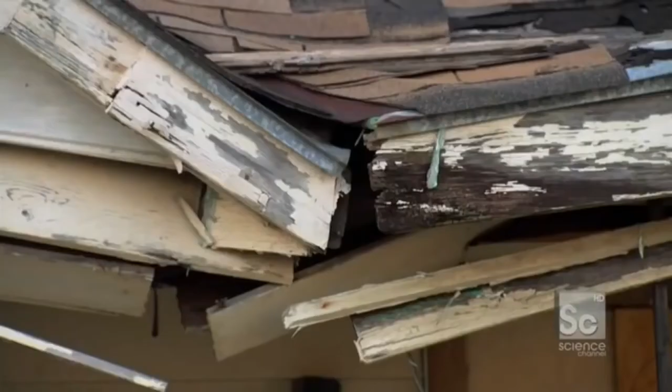It's been almost 5 years since Hurricane Katrina made landfall, and New Orleans is far from having recovered. Hurricane Katrina displaced more than 1 million residents, and since the event, less than half of New Orleans' population has come back. More than 80,000 homes remain unoccupied. The people of New Orleans are still living with the constant threat of another major storm. So this is still a city very much in crisis.

But New Orleans has a plan to ensure the city's safety for years to come and give people the confidence to come home. The federal government, the Army Corps of Engineers, and thousands of Americans are coming together to try and save this city. They're rebuilding New Orleans with hundreds of state-of-the-art, hurricane-resistant homes and a radical $14 billion storm protection system.

Prior to Katrina, this wall was the only line of defense that those residents had. It was the primary line of defense for hurricane storm surge. Tell me what's different now. What's different now is we've taken a step back and looked at the larger New Orleans area, and we've actually moved the primary hurricane defenses from this location to areas 8 miles away.

8 miles from downtown New Orleans, they're building this. A 2-mile-long, over 150-foot deep flood wall that is fundamentally changing how New Orleans will fight hurricanes. It's unlike anything ever built. The largest surge barrier in the world, nicknamed the Great Wall of Louisiana, designed to hold back over 44 million gallons of water from an oncoming storm.

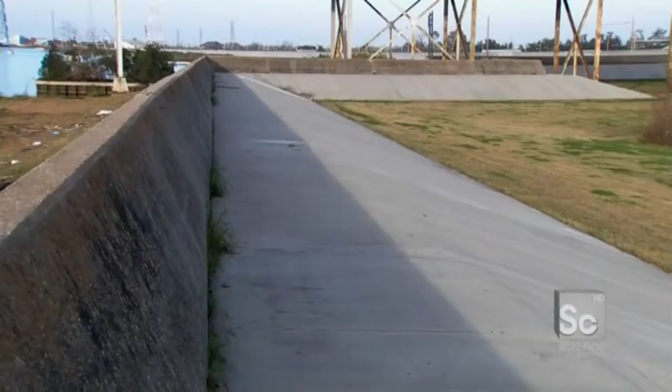Prior to Hurricane Katrina, stormwater flowed into New Orleans and was met by a 350-mile network of earthen embankments called levees. Located just 100 feet from people's homes, they held back the water, keeping the city dry. But when Katrina hit, the system was so overwhelmed by water, the levees broke in 50 places, flooding 80% of the city in just 5 hours' time.

To avoid this disaster happening again, the surge barrier is being built miles away from downtown New Orleans, where it can stop the water before it enters the city. Instead of waiting for the storm to come to them, for the first time, they are taking the fight to the storm. Is this a new way to think about battling hurricanes?

Nowhere in the world have we built a wall trying to keep out 25, 26 feet of water. No one's ever done it before. And this height here on a storm surge is unique. You gotta remember, the hurricanes that come to New Orleans are bigger, meaner, and there are more of them.

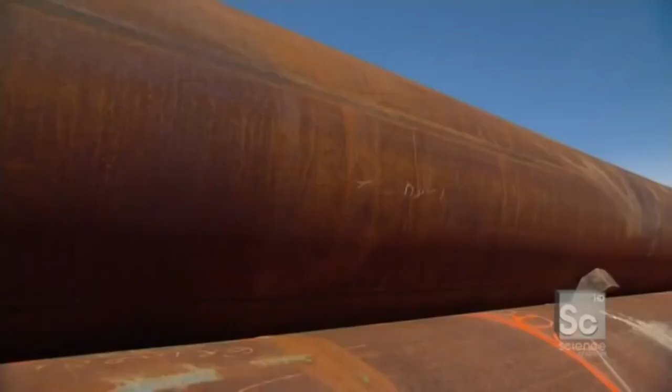To hold back a 26-foot wall of water, the barrier is fortified by 628 batter piles. When the storm surge hits the wall, what pushes back and keeps that wall upright and strong are these guys right here. They're called batter piles, and they're basically 288-foot-long steel tubes inserted into the back of the wall that support it and transfer all the loads of that storm surge into the foundation.

Since there's no bedrock to hold the pile in place, over 80% of the wall is actually below the mud line. The deeper the pile is driven, the more friction there is to hold it in place. Each pile is almost as long as a football field and placed at an acute angle for added stability.

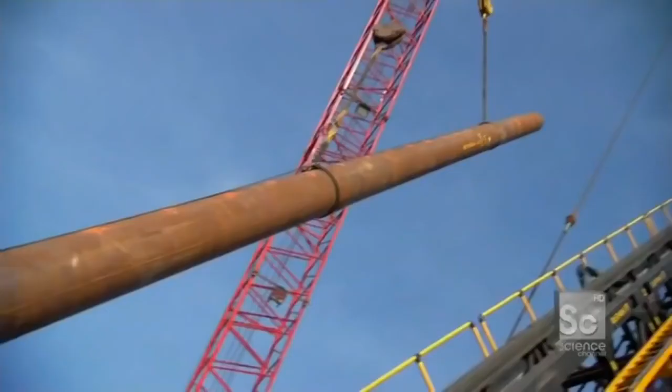What'll be interesting about this lift is that this pile right here is horizontal, right? But in the end, we have to get this thing at a 57-degree angle to feed it into the machine called the leads. No one has ever attempted to drive piles this size at an angle before.

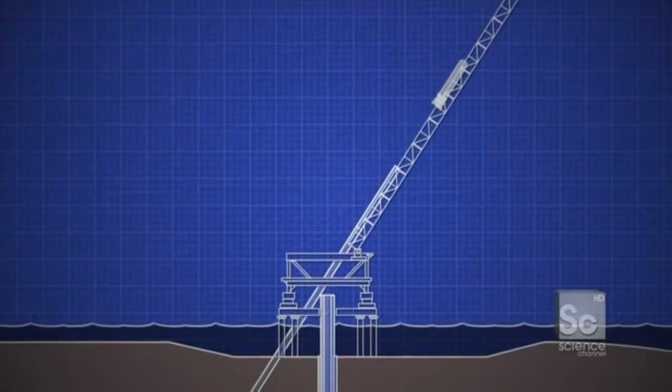To accomplish this engineering first, the Army Corps invented a massive 1,000-ton machine called the leads. Unlike traditional pile drivers that can only hammer vertically, the leads can hammer the piles at a precise 57-degree angle. And with 4 chutes, they can drive 4 piles in a row before moving on, saving almost 5 months of construction time.

So here it is, lowering it through the leads, right? The thing that's leading it right down this 57-degree angle, getting into position so we can start knocking this straight into the ground.

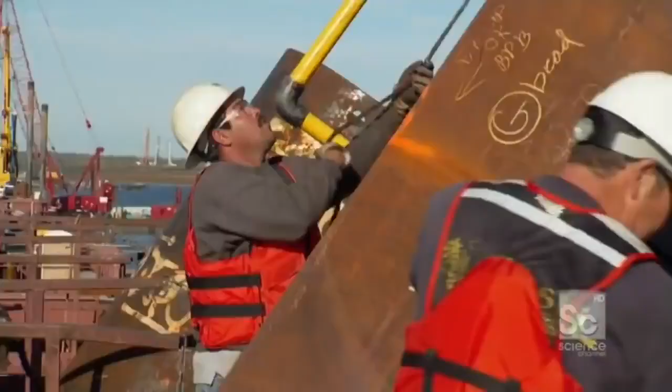Even the leads isn't big enough to handle a 300-foot-long pile in one go. So they're driven in two sections. The first section is 158 feet long and weighs more than 13 tons.

So Mike, as I'm looking at this slowly creep down into the earth, this is just sliding into the soil below, right? Into the mud, yeah. I mean, there's really nothing down there, huh? Not much. I mean, it's soft. It's so soft that the pile sinks 38 feet in a matter of seconds under its own weight.

After that, the friction from the mud becomes too great, so they have to use a hydraulic hammer. Do I run that hammer down? Absolutely. Time to drive the hammer.

So it's your job to control how much force this thing hits it, when it hits it, and how you drive the pile down. That's it. So before sun sets today, we're going to start smacking this thing and send it in? Right now, the next 2 minutes. If everybody's ready, got the earplugs on, let's go. Let's do it. I got earplugs. I'm on. Let's start smacking it.

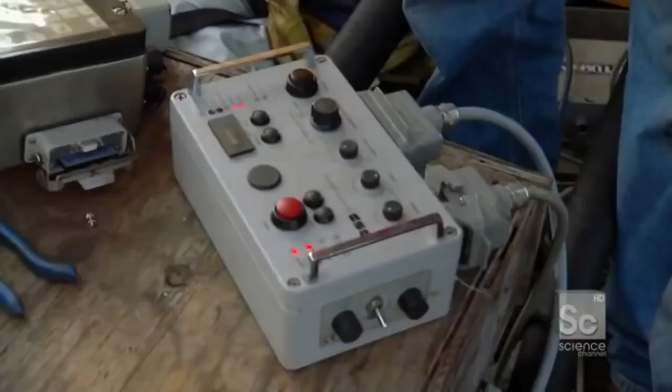Every time that hammer smacks the pile, the pile gets pushed a little deeper into the ground. During the first 158 feet of driving, each blow moves the pile 10 inches. But as the pile goes deeper and friction increases, it takes 40 blows to move the pile that same distance.

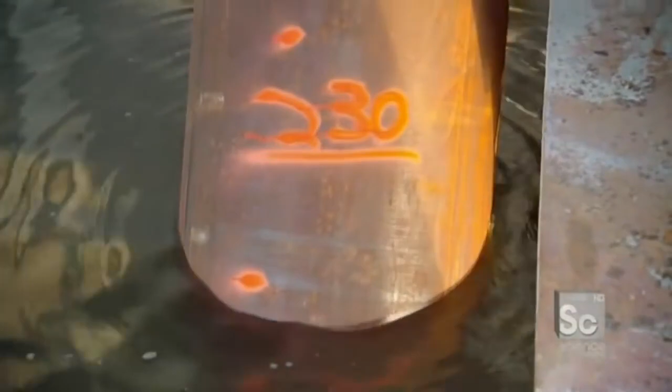So, Mike, the first piece is now in place. Right, and now they're going to bring over the second piece, which is that one right there.

Loading it like a rocket launcher almost. They have to get the piece in, tamp it down, and line one end up with the next. Line it up, line it up! All right, so here it is, it's coming down. You can see we're basically going to fit this piece into that piece, have a little bit of an overlap, and that's what they're going to weld together.

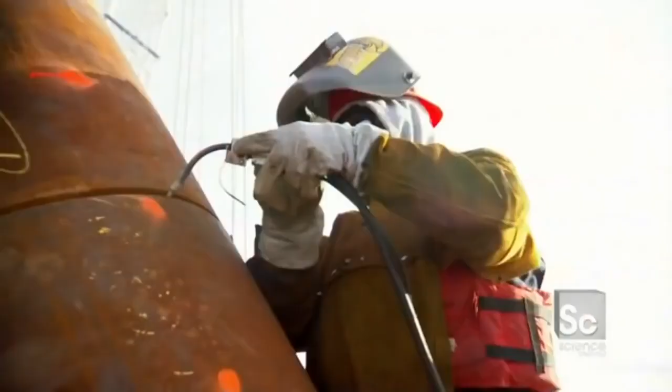So if you look right there, you can see the weld's been completed. Those two separate pieces have now been spliced into one, and now that pile is 245 feet long. The weld looks good. Yes, sir. We're ready to drive it, put it on the ground. This is the last time we're going to see this pile in the air.

So let's flip the hammer on and start smacking. Smacking it. Are you ready? Yes, I'm ready. Whenever you're ready. I'm ready. I was born to smack pile.

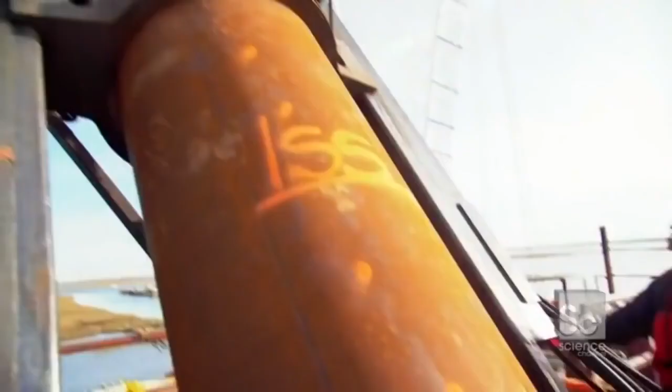It takes around 1,200 blows to get one batter pile into place. And to stay on schedule, they need to install 628 of them in just 6 months, a total of about 750,000 blows. Normally, a project of this magnitude would take more than 17 years to complete. To make New Orleans safe as quickly as possible, the Army Corps is attempting to finish the surge barrier in just 3. To pull off this incredible feat, this crew has to work through hurricane season.

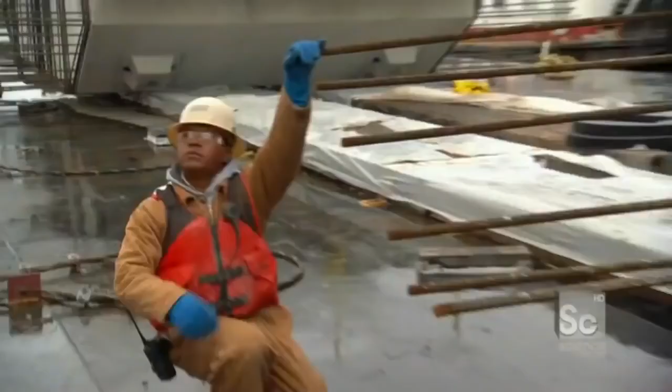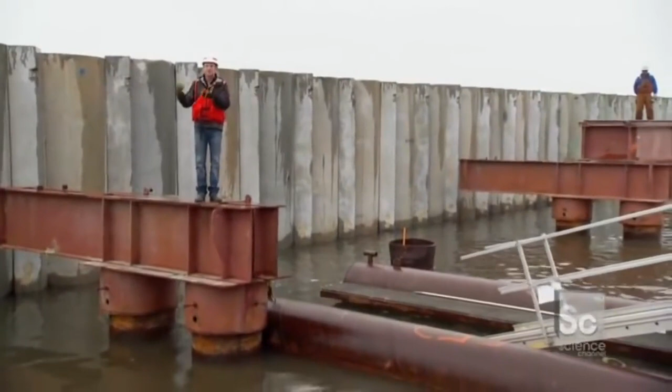So engineers came up with an innovative solution to get the job done right and done fast, even in rough waters. One of the biggest challenges when you're working in the middle of a lake is having a level surface on which to work, because barges move and tugboats pitch and roll as well. So in order to have a flat surface to accurately work, they developed that system right there called a trestle. It's a semi-permanent track that moves along with the wall construction. A trestle is basically a huge railroad track anchored into the lake bed, providing a stable workplace for large machinery.

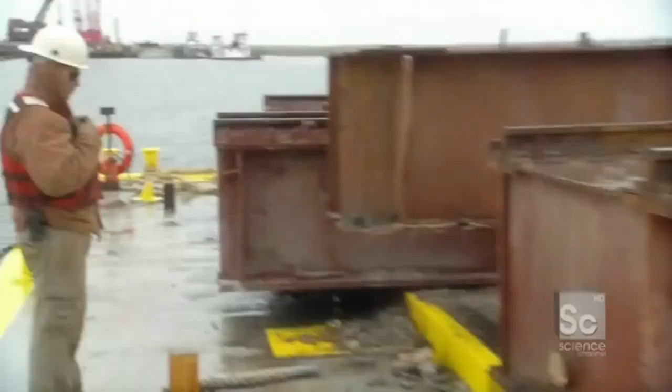The project has 1,000 feet of track for the entire 10,000-foot-long wall. So to keep construction moving forward, the trestle team has to leapfrog 50-foot sections from one end of the site to the other up to 6 times a day. 50 feet of trestle track's about to go from this barge up in the air and extend our construction platform another 50 feet. Each trestle segment has to be aligned seamlessly with the existing track. The gap can be no more than 3 millimeters, or about the thickness of a shoelace.

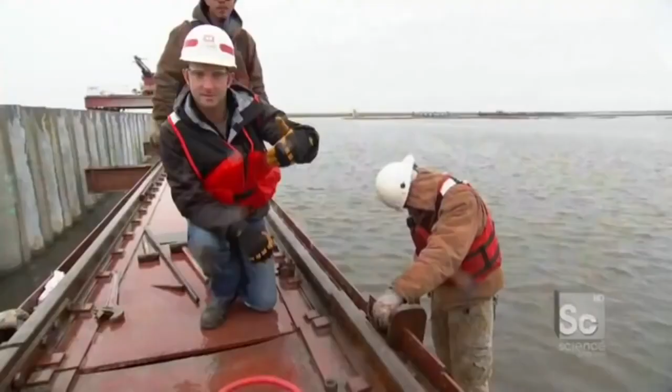Okay, so now that we have the trestle track, generally speaking, in place between the two beams, let's walk on the trestle. I'm standing on the pre-existing trestle track, and this right here is the new piece of track. As you can see, we have a big gap. We'll use this plate right here to put it on either side of the track, put the bolts in, and bind the track together. 6 bolts need to be in place to ensure a solid connection between the trestles.

The issue is we have 5 out of the 6 bolts lined up, but one side is slightly higher than the other side, so we're having a problem getting in the final bolt. The holes are about 3 millimeters off. In order to make that space to get it through, we're going to torch it out.

Would it not have made sense for me to move before he started? And on the plus side, actually, it's really cold and rainy. My right hand is much warmer than it was a minute ago.

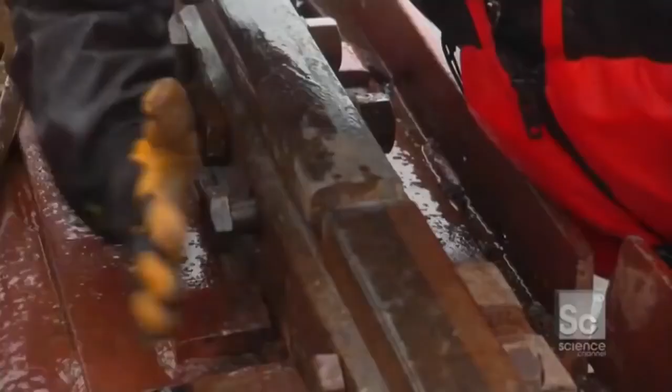So, after cutting, torching, and hitting, and just generally some emotional consternation, the sixth and final bolt, give her a smack, is through. This track has now been extended 50 more feet. The construction site will extend. Can we go home? We finished now?

Up next, building new lives and new hope in the 9th Ward, with houses designed to fight back against the worst Mother Nature has to offer. These houses are being built to survive another Katrina.

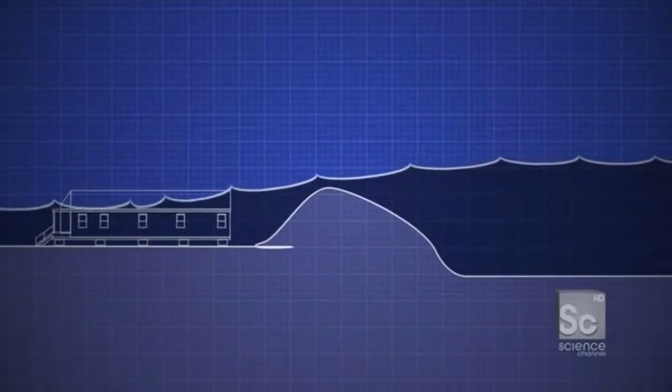When you think about what took place in New Orleans, you of course think about Hurricane Katrina. But the truth is, the actual damage that took place wasn't from the hurricane, but rather from what the hurricane created, something called a storm surge. A storm surge is a wall of water pushed out in front of a hurricane by high winds and low pressure. During Katrina, it caused waters to rise more than 20 feet, overwhelming the existing hurricane protection and flooding almost the entire city. Katrina's storm surge was responsible for 90% of the destruction in New Orleans.

And hardest hit was one of New Orleans' poorest neighborhoods, the lower 9th Ward. I was actually here filming 5 years ago, right after the event, and it was harrowing. There were houses that were just blown clear off their foundations. Others were torn in two. I saw a house that was actually sitting in a tree.

5,000 homes were lost in this neighborhood alone, and less than 20% of its residents have come home to rebuild.

Hello? Hi, Miss Leggett? I'm Danny, pleased to meet you. Can I come in? Sure, I'm just about to get started on some sweet potato pies. My timing was fantastic. Tell me what you saw when you first came back.

I mean, you came here and you looked at it and you saw nothing. There was nothing here. A porch that my daddy built twice. That was it, and the tree.

Everything was gone. After all you went through, what made you want to come back to rebuild? I didn't never want to leave in the first place. I ain't tell nobody I wanted to go nowhere. I didn't want to leave here. I was satisfied. This was home? Yeah, sure. This was home.

It's been 1 year since you've been back, and a very different house. Very different neighborhood, but does it still feel like home? Yes, getting there. We got cleaners now. We have different houses built up. More people are coming home. If you don't want to get this house, you can get another house. But as long as you come back is what we're looking for. Just come back.

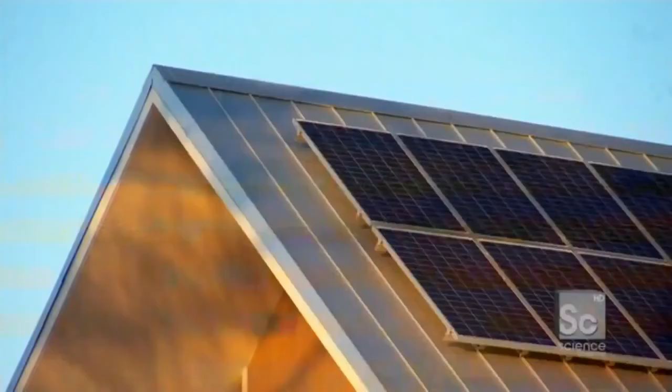To help people like Miss Leggett come home, actor Brad Pitt founded an organization called Make It Right. Their mission: build 150 cutting-edge homes, safer and more sustainable than ever before, starting in the most devastated neighborhood in New Orleans.

This is one of the areas that's hardest to build back because of the soils and because of the amount of displacement that occurred. We plant the seed in the toughest soil with some of the toughest situations in hopes of starting development all throughout New Orleans, but starting in the hardest area. It's incredible. It's an amazing project. No matter which aspect we look at, there's something incredible going on.

These homes are re-engineering the lower 9th Ward and transforming it into one of the most hurricane-resistant neighborhoods on the planet. But one of their biggest challenges isn't wind and rain, it's the ground itself. Like most of New Orleans, the lower 9th Ward is built below sea level, which basically means the ground below me is a big swamp. You build a house here, over time, it's going to sink.

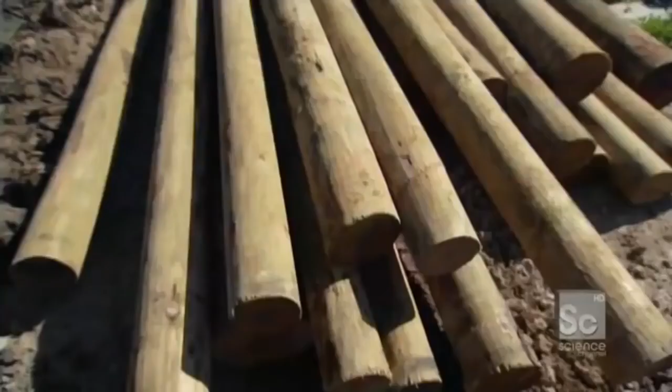So to prevent that, the Make It Right houses begin construction by driving these massive 40-foot-long piles into the earth. This is what they had before Katrina, and this is what they're getting right now. So these are real, these are built to last. These houses are built to survive another Katrina. These piles are revolutionizing how homes are built in this flood-prone area.

Previously, homes rested on top of cinder blocks. When a flood came, the house would be lifted off the blocks and sent crashing through the neighborhood. But now, these wooden piles stabilize the soft soil so it can support a raised concrete foundation. It actually attaches to the house, strong enough to keep the home in place, even in floods more than 12 feet high.

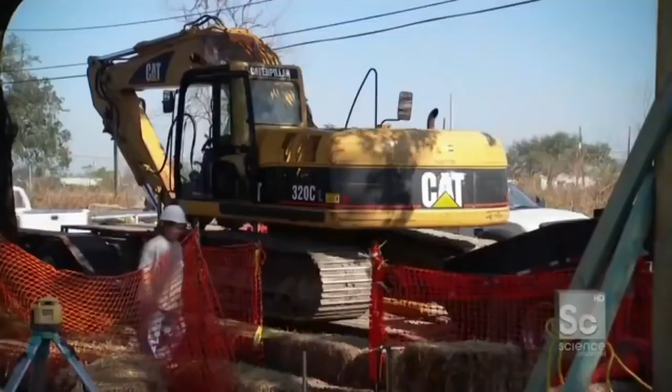Chris, how do you get a 40-foot pile rated to carry 7 tons into the swamp? You use that machine over there, called a sonic side grip vibratory driver that puts out 50 tons of centrifugal force, and it'll push that pile underground in about 2-3 minutes. So this is it, huh? This is the machine. It's like a construction action hero.

My God. Tony, why don't you spin her around so we can look at her? This has got a kind of a Mad Max Beyond Thunderdome vibe to it, you know what I mean? Yeah, I never get tired of watching it work.

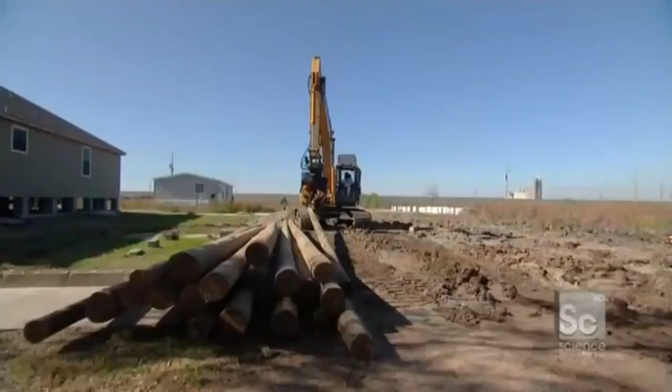No one has ever used a pile driver like this to install foundations in the Lower 9th Ward. Its unique articulating arm can grab, lift, and drive the pile all in one shot. The work gets done 3 times faster than with a conventional pile driver. Grabs it by eye, swings it into place like it's his extended arm. Puts it right down in a matter of moments. Tony says the only place he really feels at peace is in that machine. You can kind of see that too, right?

Yeah, oh yeah. To lift and move a pile requires careful coordination of 6 controls all at once. Tony's located the pile right in the corner of the foundation. We have a little circle mark for him, and he's just gonna put this thing dead smack. Perfect.

He's lined up, he's level. Now it's time to vibrate. Tony, you ready?

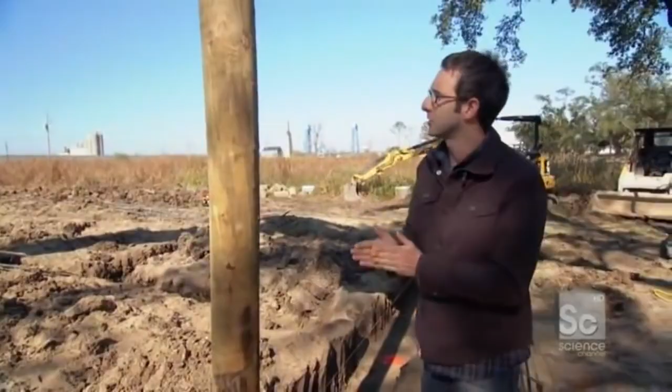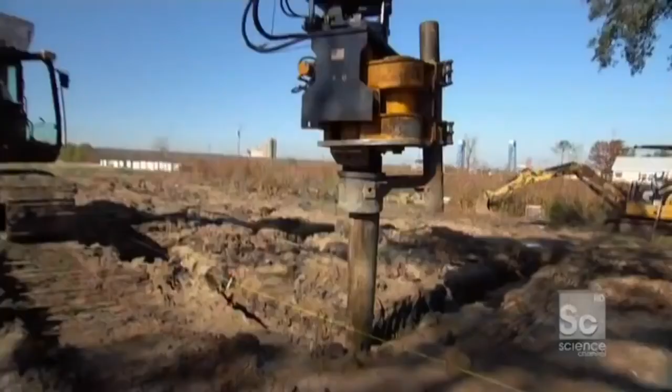So now what I'm standing on, even before the foundation gets here, is 40 feet of pile below me. And it's from this point the house now begins.

Is it hard for a rookie? The hardest part's picking the pile up. Let's give it a go. I'm gonna drop some piles. So you're Tony. Yes. I'm Danny. Nice to meet you, Dan. How you doing, man? I'm okay. We're gonna switch jobs. Yeah, you do the yelling and walking around and talking and not doing anything productive. Sounds like a winner. And I'll do the work. Sounds like a plan. All right, Tony.

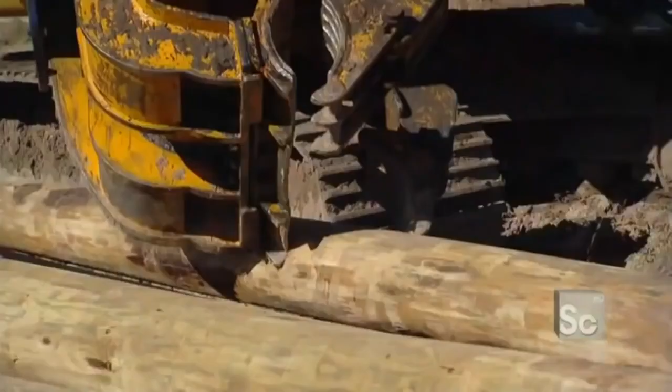Oh! Swing left over. Oh, so close. It was like I'm about to eat it. It was like, oh, here we go. Open, open, quick, clean the pile. There we go, come here. Oh! It's in my clutches. It's coming up, I got a good grip on it.

Chris, watch this, man. This is gonna be a little piece of magic. Can't beat that. How's she looking? First time out, that's not too bad.

Now tell me something, you're from here, right? Born and raised here. Born and raised, yes. So regardless of the next event, next storm, if it happens again, you come back? We're coming back. This is home, this is life, this is reality here. I come here sometime with my kids just to show them the houses, you know. This is what we're doing, we're bringing people home. It's good stuff, man. No, it really is. Thank you.

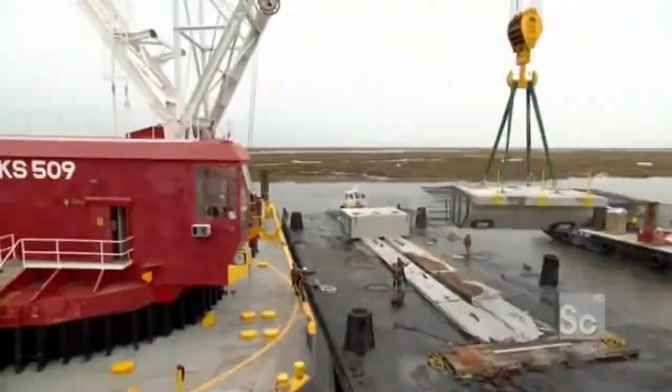It's amazing. Up next, putting together the strongest wall ever built. And we're gonna literally thread the needle, in some of the worst soil conditions in the world.

Since it was founded in 1718, New Orleans is a town that's been working against the elements, primarily because 80% of this place is located below sea level. But for the first time, New Orleanians are trying something new, working with nature instead of against it. New Orleans is built on top of a giant marshland, which for millions of years naturally absorbed thousands of gallons of rain and floodwater.

Today, most of that spongy marsh is covered by pavement, causing significant problems for this flood-prone city. In a typical situation, when it rains, what happens to that water? How does New Orleans deal with it? That water runs off, goes to our curb and gutter, goes about 8 blocks to the north of us, and is pumped over a levee at about 2 cents a gallon. That's expensive, it's time-consuming, it's a problem if the pumps fail. It's not sustainable.

In the past, frankly, relying on the pump station, relying on the city hasn't always worked so well for these citizens. Over half of New Orleans is located below sea level. This paved city is basically a big bowl. When water comes in, the only way to get it out is with pumps. So when the pumps failed during Katrina, the lower Ninth Ward was left underwater for more than three weeks. We're in a situation where our community has a real fear of water, and it's a valid fear. So the folks in this neighborhood have a different mindset on water, and we're trying to change that paradigm.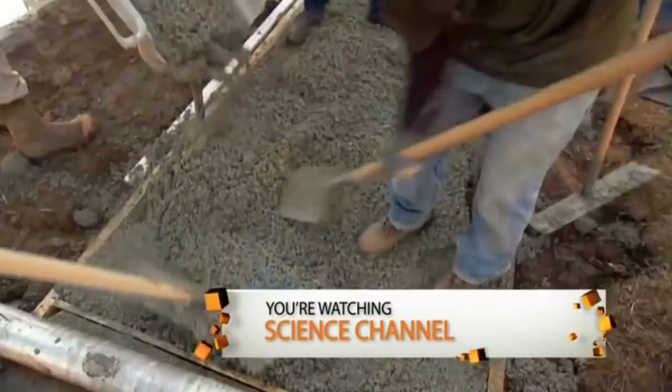To make sure this neighborhood is not left underwater again, engineers have found an innovative solution to radically reduce the need for pump stations, called pervious concrete.

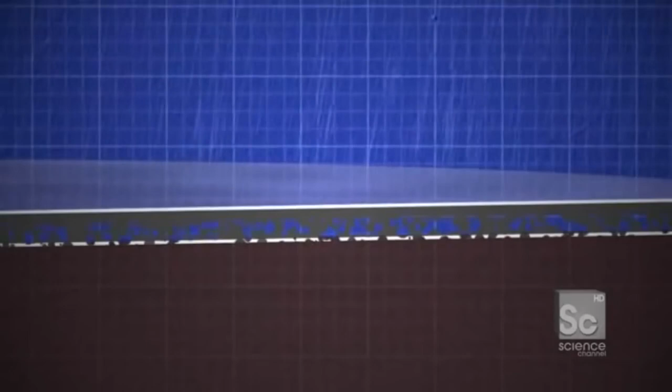As water runs off of our site, it does the opposite of what typical pavement does. Instead of a giant table that tilts water and flows it to the curb and gutter, this is a giant sponge that accepts rainwater, stores it in the concrete and below, and doesn't hit the curb and gutter and run off our streets. So you're telling me this driveway and this sidewalk, when rain hits it, it's actually going to absorb that water? Correct. Unlike conventional concrete that repels water into the storm sewer, pervious concrete absorbs it. Filled with tiny air pockets, it allows water to flow through it and into the native marshland below, where hundreds of thousands of gallons can be stored naturally.

Do you have any actual finished stuff that we can see? Yeah, we have a little mock-up right here. It actually does look like a Rice Krispie treat.

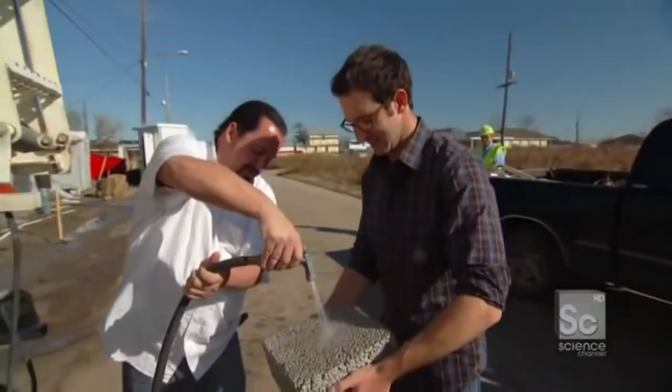All right, let's simulate right now. I'm a driveway, you're a rainstorm, and the rain's coming in. It just stores up, it's just eating it like a sponge. And then it comes out the bottom. Look at that. Now, typically, all that rain we just dumped down would go from this driveway into the sewer system and have to get pumped out. Correct. At ultimate build-out, we will be saving several hundred thousand gallons of water hitting the storm sewer every rain event.

And that all starts with you, me, and a bunch of guys pouring some concrete. Absolutely. Here it comes.

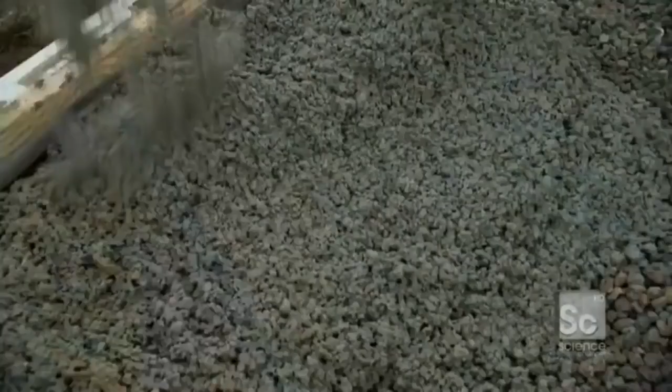It doesn't look normal, right? It's much drier, thicker, and chunkier. Because of this consistency, pervious concrete pours much slower than conventional concrete and dries much faster.

So we have just 15 minutes before the concrete sets. We're actually trying to push the concrete out, but then actually compact it. Yeah, we're gonna compact it. We're gonna pour it three-quarters of an inch higher. Got it. What I'm doing right now is sort of the opposite of what you do with normal concrete. Typically, you vibrate concrete to get the air bubbles out. Here, we actually compact it tight to get lots of air bubbles inside of it. That's how the water goes through it.

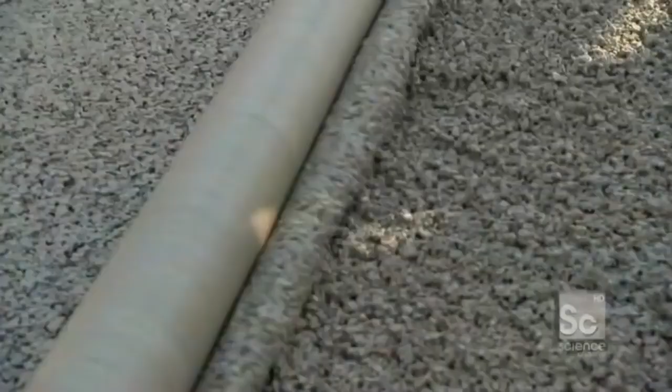Compacting the concrete is the most critical part of the process. If it's compacted too tight, it won't absorb the excess water. Too loose, and it'll crumble. To do the job quickly, they use a specialized 150-pound roller called a screed.

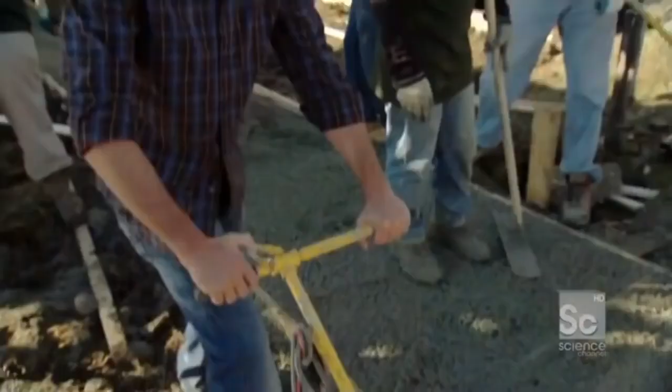Ready? You want to pull it? Yeah, now I'm pulling it. All right, come to me. Here we go, stay with me. Nice and slow. I'm making pervious concrete, you know why? Because I don't want concrete to push water in the sewer system, do you? No, you don't. Good job, good job, that was perfect.

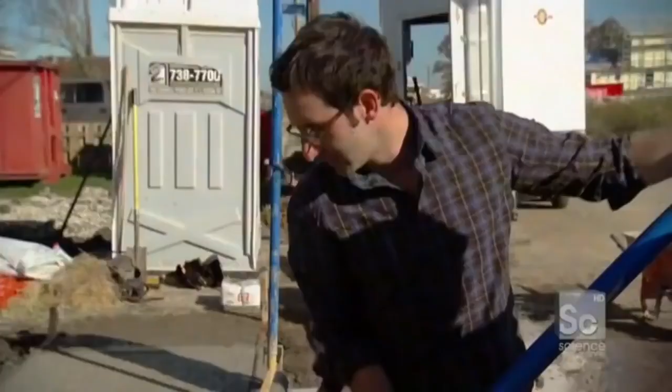Beautiful. And although it may not look like it, this is actually the finishing touch. This is the layer of concrete that you'll see every time you walk down the Make It Right streets. Big, hard, dense Rice Krispie treat that all the while is sucking up the water and making sure it does not go into the streets. I love it, man.

So for me, what I'm fascinated by is that you want this to be strong and heavy and beefy. But if it's too heavy, the soil's so weak your wall will actually start sinking. That's one of our challenges. We need a very strong wall, but you also need a light wall, comparatively speaking, for concrete of course.

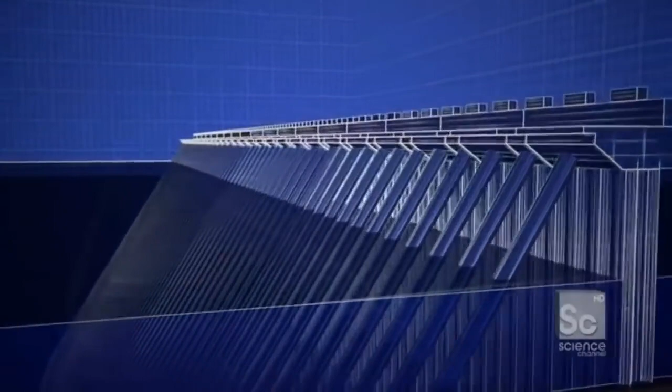We can't build a Great Wall of China here because the massive weight of it would simply sink out of sight. Instead of building one solid structure, like most levees or dikes, engineers designed the New Orleans surge barrier as an A-frame. It uses half the material, but it's actually stronger than a solid structure. The key to its strength: 330 concrete caps placed at the top of the A. They link the vertical piles to the batter piles, directing the force of the storm from the front of the wall, through the batter piles, and down into the marsh, dispersing the loads and keeping the wall strong but light.

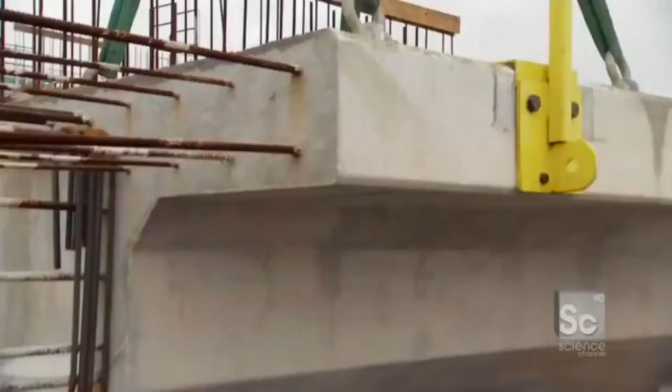So Vic, when the soldier piles are in, the batter piles in place, what ties them all together and makes them one structural system are these guys right here. That's right, these are caps. So essentially, your chain is as strong as your weakest link. Yeah, absolutely, and this is the link, essentially. This is what connects the two types of piles. This 96-ton piece of concrete, very high-tech design, transfers that energy.

Before the cap can be lifted, each joint has to be reinforced with a waterproof seal installed between the cap and the piles. This is the seal, right? It's like the gasket, yeah, to hold the concrete on. Keep it tight. Yeah, to make sure the batter pile meets the cap and you get one tight joint.

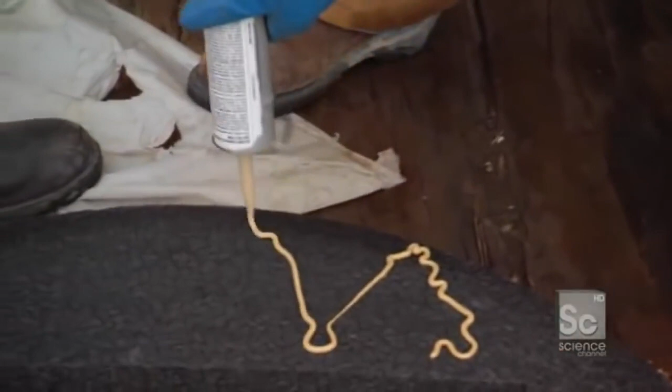The seal between the cap and the batter pile is created by the weight of the 96-ton cap. Luis, AKA Jackson Pollock of the glue, uses construction glue to hold the seal in position while the cap is lifted up onto the wall.

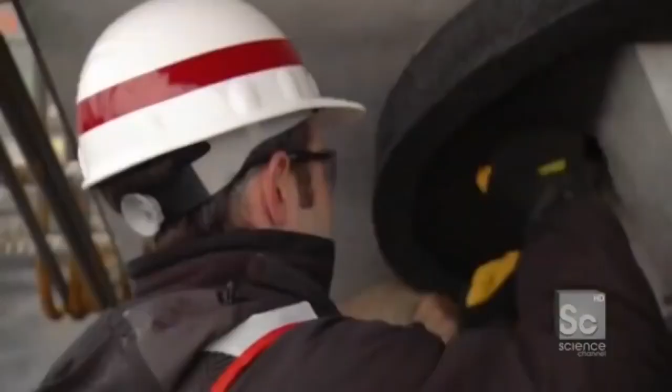All right Luis, let's pop it on. Okay. 96 tons, holding back 200 billion gallons of water. And during construction, duct tape. How's she looking, Luis? Pretty good. Pretty good? Yeah, looks good. Very good? Very good, I say.

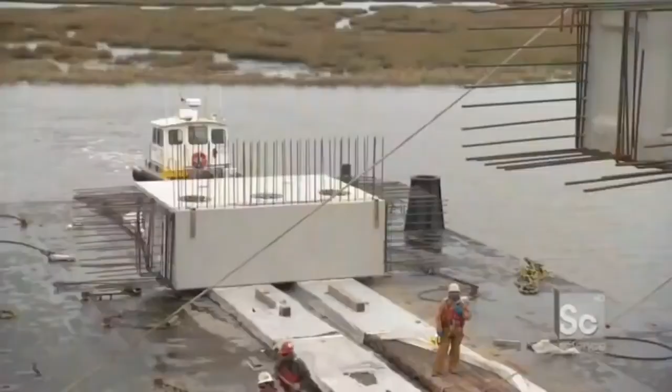Okay, that's it, our four shackles are attached. This now 96-ton cap piece is about to get lifted up from this barge and placed atop the flood wall. The 300-ton crane is located on a barge, causing the cap to bob and swing during the lift, making precise alignment a real challenge. And we're gonna literally thread the needle, take these 3 shear pins, which extend the soldier piles, and put them right into the cap, fusing them into one.

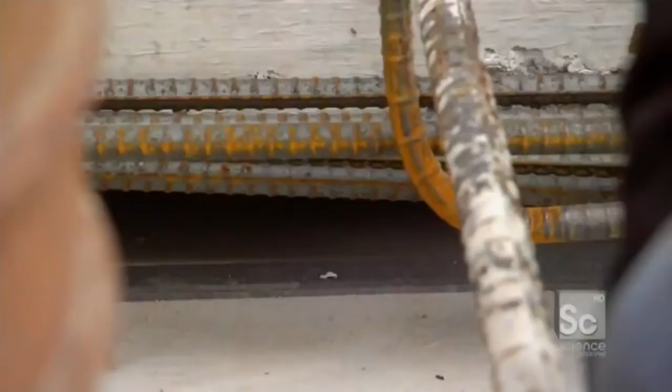Once in place, the cap transforms the wall from 5 separate elements into one structural unit for the first time. Even as it comes down a few inches, 96 tons or otherwise, a little bit of motion can still move the thing, so we're shifting over just a couple millimeters. As you can see, the cranes are detached, sending the shackles home. This is in its final location, 96 tons lined up within millimeters. One down, move on to the next one. Up next, we're going, come to Papa.

Racing to fuse the wall together with one of the fastest concrete assembly lines ever designed. You can open it on up now. But first, what wind speed can the new Make It Right houses in the Lower Ninth Ward safely withstand? The answer after the break.

The answer to our trivia question: the Make It Right houses can safely withstand 200 mile-per-hour winds, enough to survive a Category 5 hurricane. Given the amount of investment that's going into saving this city, sometimes the question is asked, should we save New Orleans? But it's important to point out that this is more than just Mardi Gras. New Orleans represents 1/4 of all domestic oil production for America. The Port of New Orleans is one of the most important ports we have. It's the very gateway for all shipping traffic to the Midwest. This port is so important, it's been defended for more than 200 years.

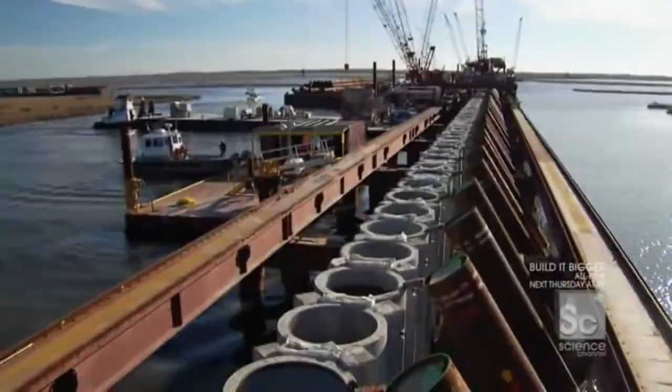The surge barrier is designed to continue protecting the port and the 2 million people in and around New Orleans for years to come. We're constructing a wall here which we know is pretty robust. I mean, several hundred years from now, this structure will still be here because nobody's going to take it. It's not coming out anytime soon. So the reality is this will provide viable surge protection for the city of New Orleans for a long time to come. This massive wall is engineered to last for 100 years, but they have to build it in just 18 months.

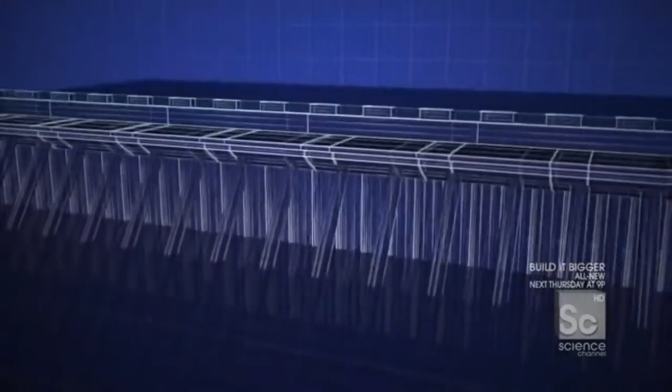And you guys have basically designed a system for speed. Yes, for speed, big time. Engineers, they've been thinking about this for a long time, we're just making it work. To save time, they're using an assembly line. First, a crane drops in prefabricated concrete caps, leaving a 6-foot gap between them, not wasting time lining them up.

Behind them, another crew fuses the caps together with poured concrete, smoothing out any misalignments. This system shaves off more than 6 months.

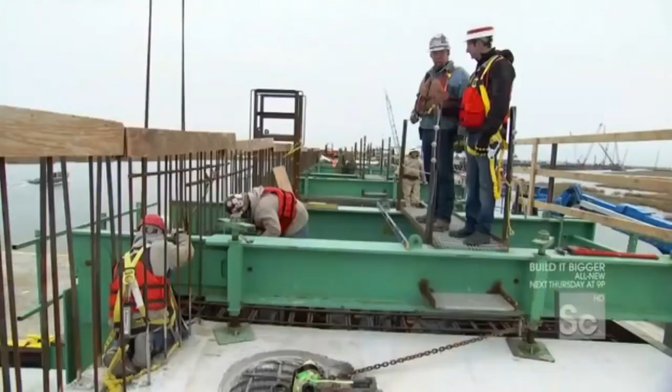Rather than having to worry about getting it exactly right with millimeter tolerance on site, they just keep moving. Even if he's a little bit off, misses the mark a little, Rusty comes in and fixes it up. It's like Legos with a little bit of silly putty in the middle.

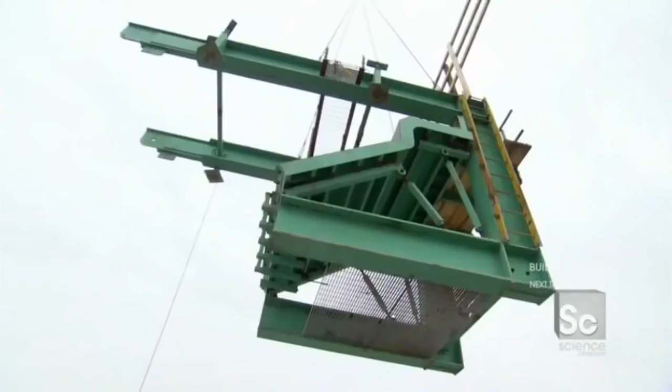To fill the space in between the caps, they pour the concrete into custom formwork. What we're looking at here is essentially a 10,000-pound mold, shaped exactly like the precast caps. We bring it into place between two precast caps, forming them together as one.

Cabling on down, a little bit. All right, we got our hands on it. Hold that, a little bit of right swing. Down easy, 6 more inches. A little bit, all right, hold that. Another shot, boom up now. Booming up. You done this before? A few times.

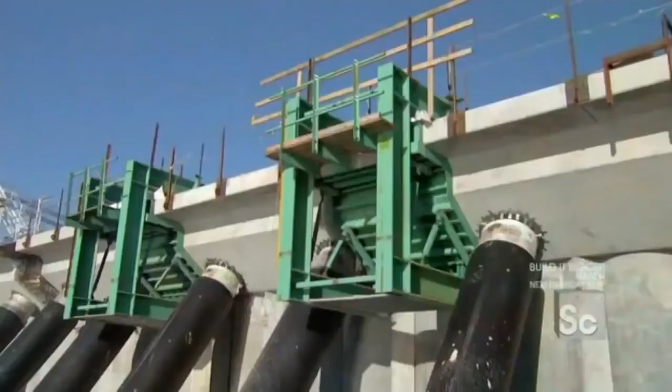The formwork snaps into place with alignment pins, matching up perfectly with the two caps on either side. This snug fit allows the poured concrete to smooth out any minor errors in the placement of the cap.

Okay Rusty, when I got here about 15 minutes ago there was a big gap between these two pieces of precast, a big hole. Now the form is on, both of them, done incredibly quickly. Tighten up the bolts, put in the pins, and then pour some concrete.

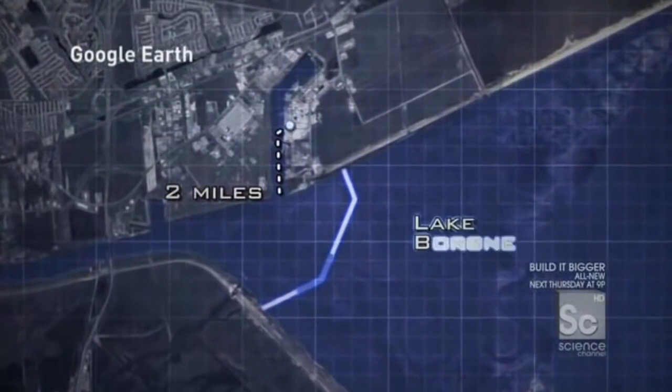The team now needs 36 tons of concrete to fill the gap. But they've got to transport it from the concrete plant 2 miles away to the construction site in the middle of Lake Borgne, all before it starts to dry.

There it is, coming around the corner right now. So here's the concrete. It takes about 15 minutes from where we're at to get to the dock, about 10 minutes to load, and then 15 minutes back out.

Since they're losing about half an hour in transit, Rusty's team now has a narrow 60-minute window to pour the concrete before it cures.

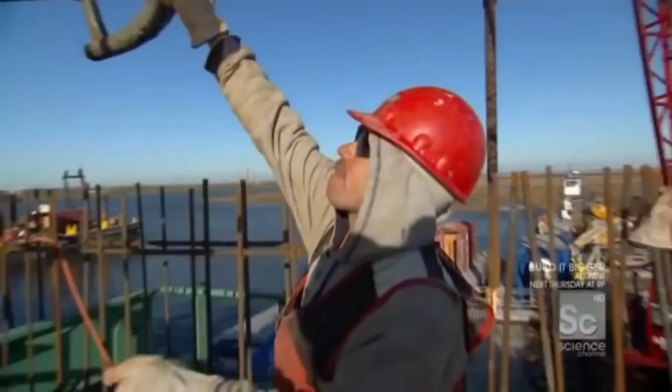We're going right now. Come to Papa. You can open it on up now. Open it on up. That's it, let's go get another one. That's it, we just keep going. Well there it is, as fast as she came, she went.

To fill the gap, they have to lift 9 bucket loads in under an hour. 2 yards of concrete in the hole, down the chute, and in the space. 2 yards go out, 2 more yards are coming in. It just comes in fast.

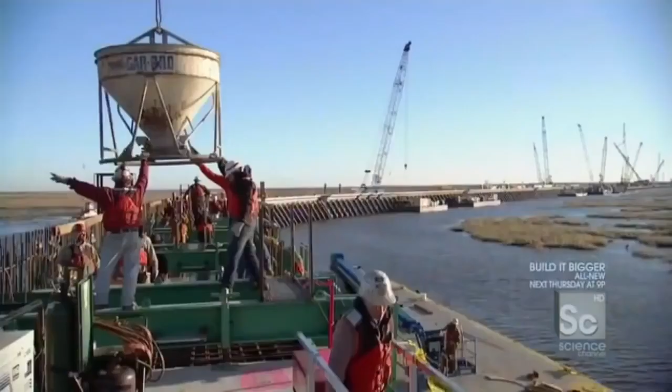Once the gap is filled, it'll dry in 2 days, permanently fusing the caps into one monolithic concrete structure.

Whole thing took us, what, 15 minutes? Probably 15, 20 minutes.

When you're doing a job like this, pouring this concrete, it's not hard to remember why you're doing it. Everybody out here enjoys coming out here because we are building it for a reason and for a cause, to save people's lives, property, all that.

You get a sense that this thing is done right, this wall gets done in time, this city's gonna start to come back? Oh, yes. I believe that 100%.

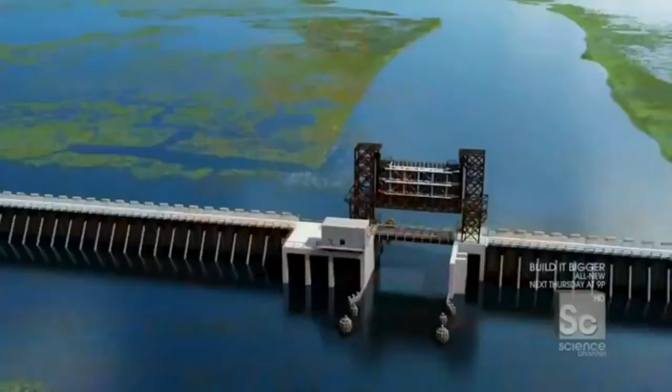This innovative concrete assembly line is giving New Orleans a barrier that will act as the primary line of defense.

And on a smaller scale, another revolutionary type of concrete is being used as a second line of defense to design homes 3 times stronger than normal.

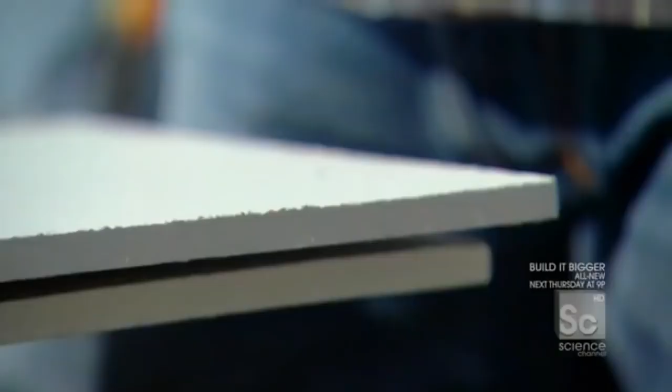The design of the Make It Right houses is to survive a hurricane, but also to last the test of time. So instead of wrapping them in traditional wood siding, which rots over time, they're trying something new. They're wrapping these houses in cement, using something called HardieBoard, a cutting-edge siding made of compressed cement designed to last for over 50 years.

So what do we have in this environment that bangs up siding so badly? A lot of rain, humidity, storms. You're in the Gulf South, a lot of moisture. So the outside of these houses are kind of getting slaughtered. Absolutely. And what's different about this cement board? It will not rot away. This siding is made of an innovative compound that does not mold or rot when wet.

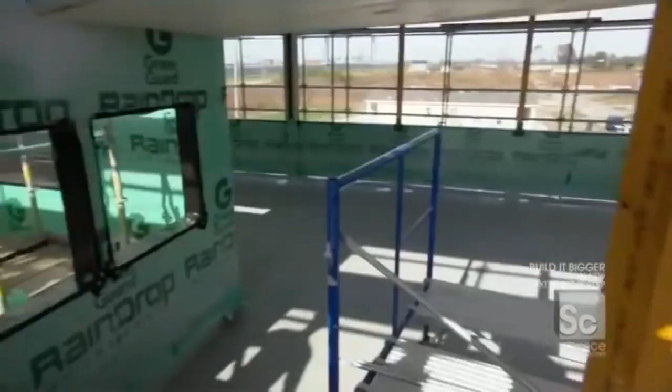Unlike traditional houses that have to be demolished after a flood, this house will simply dry out in the sun. But in order to do its job, the siding has to stay on the house, even in Category 5 winds, because during a hurricane or any strong storm event, there's suction that actually pulls the skin off the building. If that corner were to come off during a high wind, it would take that sheet, and probably the next sheet, and keep on going.

They've calculated the position of every nail to ensure the siding is windproof. There's something tank-like about taking a house, wrapping it in a kind of thin cement frame, and keeping your nail patterns hard like rivets. Absolutely, it's like armor plating. This house is going to be here for a long time.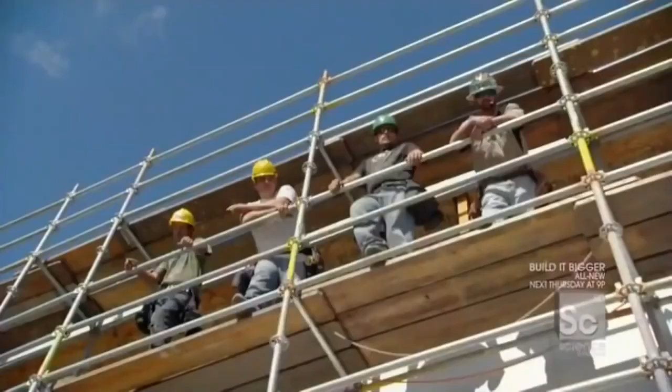So how do we install the cement fiberboard? We've got some guys up top getting ready to install some right now. It's only a half inch thick, but this 4x8 piece weighs almost 80 pounds, twice the amount of traditional wood siding. There it goes, cement board to the sky.

So I'm now standing at the 3rd floor of the house, and what you're looking into is actually an outdoor covered deck, and on the underside of this covered area we're going to apply this board.

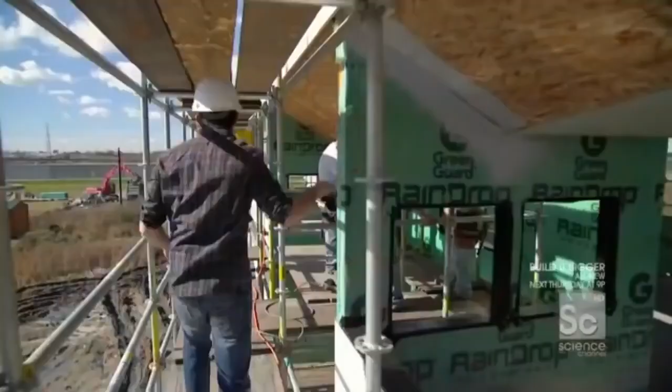All right fellas, how you doing? Watch your feet. So you're from Louisiana? New Orleans, an amazing place, nice weather, sick architecture. Oh, and heavy cement board.

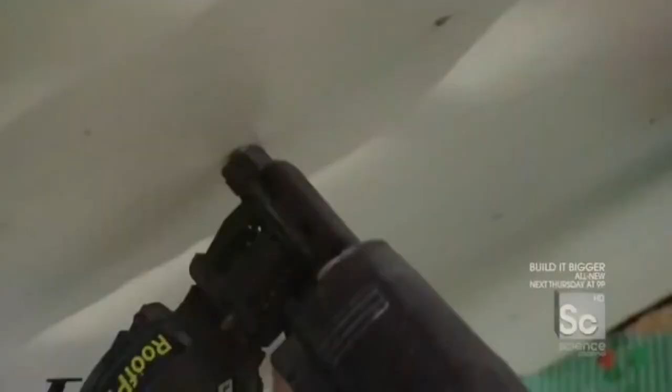Yeah, we're just gonna kind of roll it over. It takes 6 people to position this single panel. It has to be perfectly flush with the previous board in order to form a windproof seal. No, a little higher, come on up. There we are, who's got a nail gun? Right behind you. That is on pretty damn tight.

And that's it, look at that. That quickly, about 8 feet of siding goes up, the very outside of the house, what will keep rain out of this thing, keep it dry, and last 50 years. Isn't that right, Troy? 50 years. Once they put paint on there, she'll last a while.

Coming up, finishing the world's largest surge barrier with a medieval castle-like design that can slice through 100-foot waves. You look at it, you think it just looks cool, like you've got archers shooting bows and arrows, but there's a reason behind it. There's a reason.

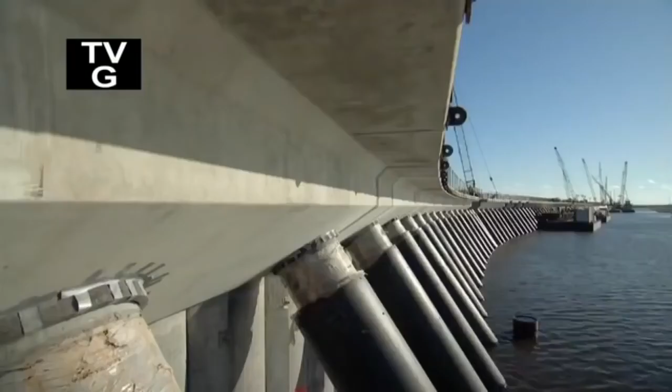New Orleans' new 2-mile-long surge barrier will give residents much-needed hurricane security, but it's difficult to rebuild with confidence until it's done. With the next hurricane season just 9 months away, this construction team is working around the clock to finish in time. It's about 8pm, the sun has set, the moon is out, and I'm going to work right now. Given this non-negotiable deadline of finishing this wall before hurricane season 2011, the guys are not just working 7 days a week, but also 20 hours a day.

Rick, Max, father and son, formwork crew. What is it, the graveyard shift? Just about, yes sir.

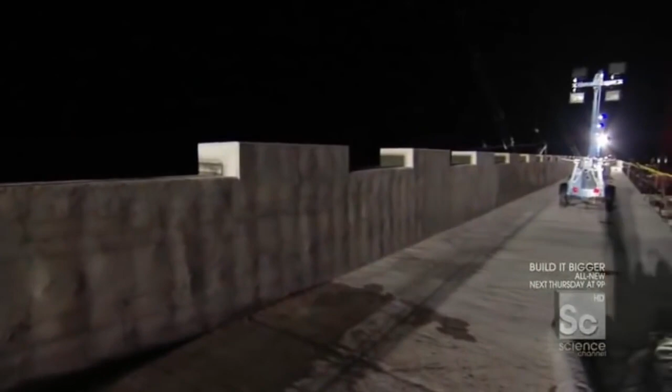It falls to the night crew to finish one of the surge barrier's most crucial elements, the parapet wall. You look at it, you think it just looks cool, like a castle thing, you've got archers shooting bows and arrows, but there's a reason behind it. It's actually part of the system that beats down waves. While the lower part of the wall holds back the storm surge, it's the upper part of the wall that takes on the massive waves on top of the surge. Its castle-like notches are designed to chop big waves into smaller, less destructive ones that splash harmlessly on the backside of the wall, preventing millions of gallons of water from ever reaching the city.

In terms of what's actually fighting the storm and fighting the waves, this is what does it. This is the final edge of this thing that's actually going to hold back the water. And we're pulling off that form tonight, you're going to see what it looks like when we pull it off for the first time. The parapet wall is made up of 2-foot-thick concrete poured each morning.

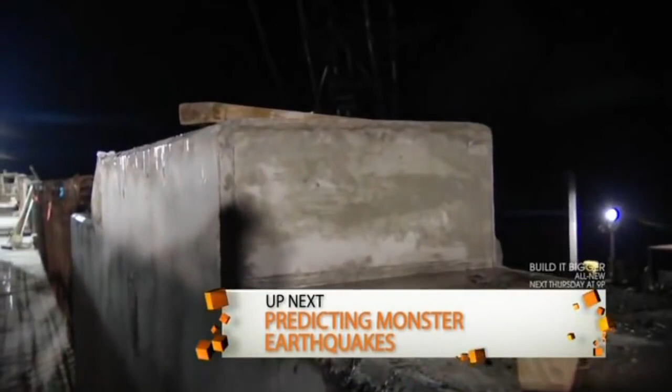To keep the daytime crew on schedule, the night shift has to remove and reset 2 of the massive 36-foot molds in just 6 hours. So by day, they place the concrete. At night, we pull the forms, we set the forms. Next day, they come back, they pour the concrete. It's ongoing, got a mile and a half of it to do. We got to get busy, stay busy.

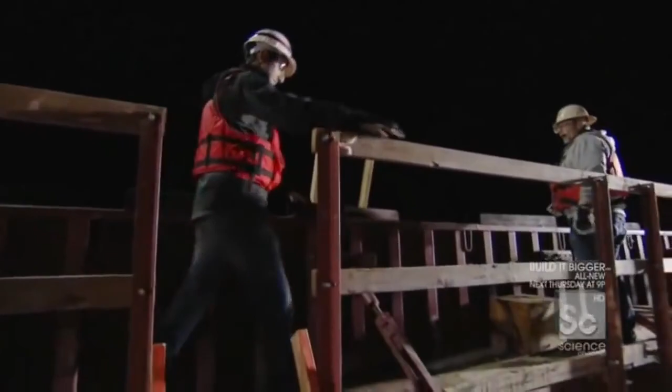The forms are 8 feet tall and weigh over 10 tons. To lift them, the crew needs the biggest crane on site, the mammoth 240-ton barge crane. Rick's putting a little bit of tension in the line to look at the shackle, make sure it looks right, they're even, they're not pulling, they're not buckling. If he's happy, we're going to get off it, start the lift. What do you think, Rick? It's holding good. Let's go ahead and get down.

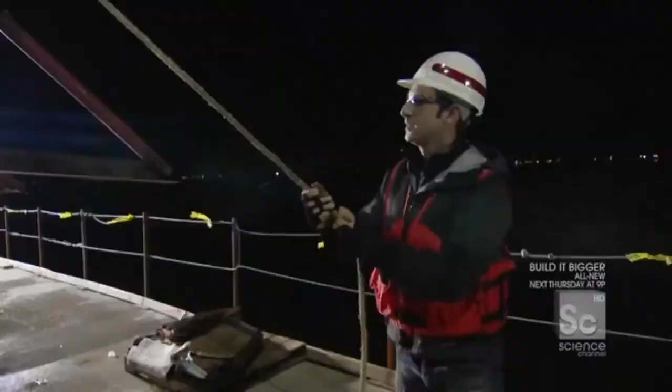All right, the formwork is ready to go. Crane has tension. And as it comes up, what you'll get to see is the exposed parapet for the first time. So just as we've gotten this thing off, we revealed the finished concrete wall, cleaned it, not a moment too soon. We're going to pop it back onto the rebar and begin the process all over again.

It all starts over again. There's no time to waste here, is there? You're holding up the show.

Let's go. The most important step is to knock out the wooden blocks that form the parapet wall's wave-chopping notches. A couple of smacks, pop it up, take the pry bar, pry it off. All the while do it such that we don't damage it so we can reuse it on the next form. You got it. I'm on it.

Who needs a pry bar?

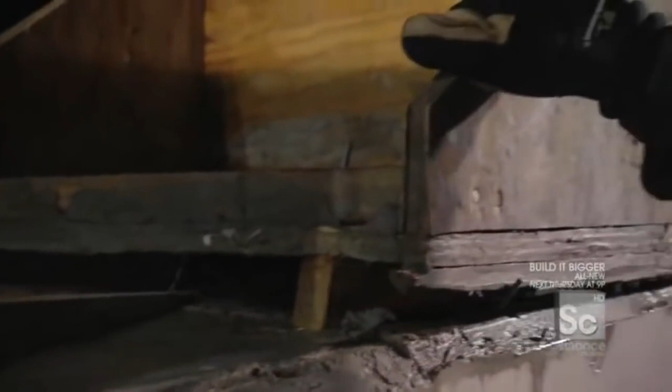This way it's supposed to come off and stay intact. Look at that nice edge. So we'll pop a couple more of these off? Pop a couple more and we'll go check on the form, see if it's ready to go. I promise I won't break them. Take care of it. Nice, smooth, 90-degree, notched-out finish.

With all 12 blocks removed, the wall is 36 feet closer to completion. Only 1.5 miles to go.

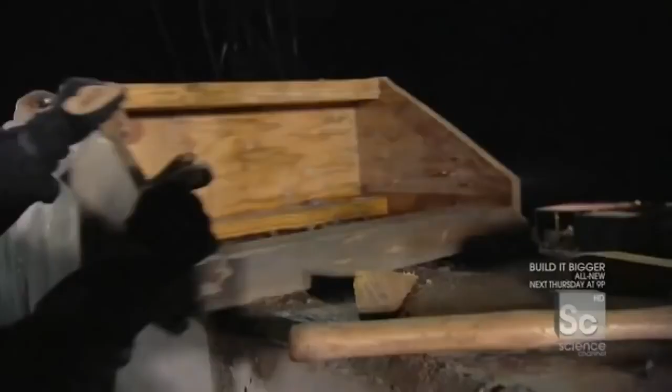Do you get that sense that after 5 years, New Orleans is beginning to get back on its feet? It's starting to get back. They ain't never gonna take it away from Louisiana. We've still got it, we're just putting it back together so we can enjoy it again. And this wall's a big piece of that. It's gonna be a big part of it. Makes you kind of proud of what we're doing. Right now we got work to do, we need to get this done.

Understood. In just 11 months, the surge barrier will be operational, giving the people of New Orleans hurricane protection that they've never had, and the confidence to come home and rebuild in the city that they love.

See, this is my home away from home, and I just love looking at New Orleans. So Miss Leggett, when someone who's not from here looks out and says, has New Orleans got a shot? Is it going to come back? I tell them yes. Yes. Good shot. Good shot.

Miss Leggett and more than 300,000 others have already returned to New Orleans to rebuild and transform their city. The recovery of New Orleans is a complicated issue. On the one hand, if you don't hold back the water, the city just won't survive. But beyond fortifying walls, it's also about building a community, a place people want to call home. It's part infrastructure, but it's also part dining room table. And what I found in New Orleans is that they're actually doing both.

8 miles from here, the new surge barrier will hold back the next Katrina. Here in the lower 9th Ward, one of the worst hit areas, you're seeing more than just signs of recovery, you're seeing a full-blown redevelopment. The Make It Right houses are taking what they learned from the tragedy and transforming it into innovation. And that, in the end, is what real recovery is. Taking the existing culture of New Orleans and transforming it into something new.

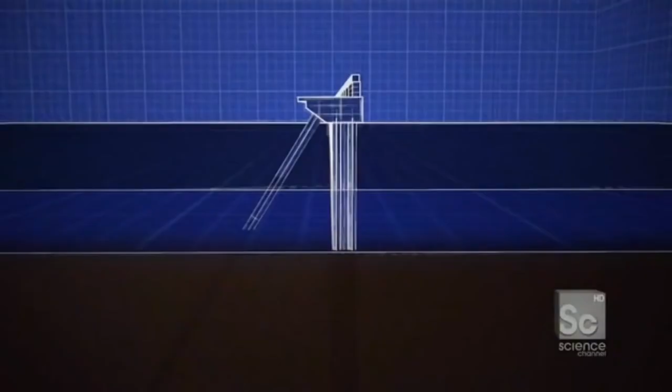Since there's no bedrock to hold the pile in place, over 80% of the wall is actually below the mudline. The deeper the pile is driven, the more friction there is to hold it in place. Each pile is almost as long as a football field and placed at an acute angle for added stability.

What'll be interesting about this lift is that this pile right here is horizontal, right? But in the end, we have to get this thing at a 57-degree angle to feed it into the machine called the leads. No one has ever attempted to drive piles this size at an angle before. To accomplish this engineering first, the Army Corps invented a massive 1,000-ton machine called the leads.

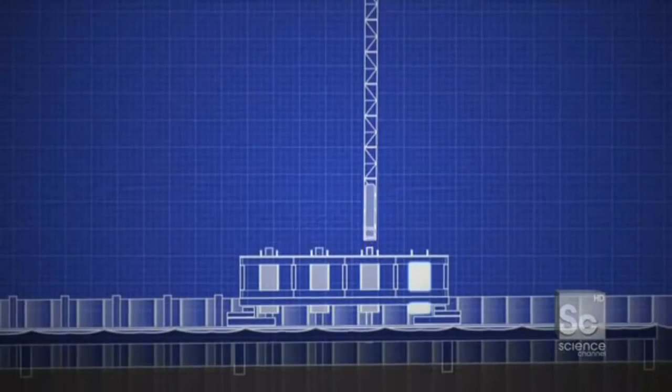Unlike traditional pile drivers that can only hammer vertically, the leads can hammer the piles at a precise 57-degree angle. And with 4 chutes, they can drive 4 piles in a row before moving on, saving almost 5 months of construction time.

The levees broke in multiple places, flooding 80% of the city in just 5 hours' time. To avoid this disaster happening again, the surge barrier is being built miles away from downtown New Orleans, where it can stop the water before it enters the city.

Instead of waiting for the storm to come to them, for the first time, they are taking the fight to the storm. Is this a new way to think about battling hurricanes? Nowhere in the world have we built a wall trying to keep out 25, 26 feet of water. No one's ever done it before. And this height here on a storm surge is unique. You gotta remember, the hurricanes that come to New Orleans are bigger, meaner, and there are more of them.

To hold back a 26-foot wall of water, the barrier is fortified by 628 batter piles. When the storm surge hits the wall, what pushes back and keeps that wall upright and strong are these guys right here. They're called batter piles, and they're basically 288-foot-long steel tubes inserted into the back of the wall that support it and transfer all the loads of that storm surge into the foundation.

So here it is, lowering it through the leads, right? The thing that's leading it right down this 57-degree angle, getting into position so we can start knocking this straight into the ground. Even the leads isn't big enough to handle a 300-foot-long pile in one go, so they're driven in two sections. The first section is 158 feet long and weighs more than 13 tons.